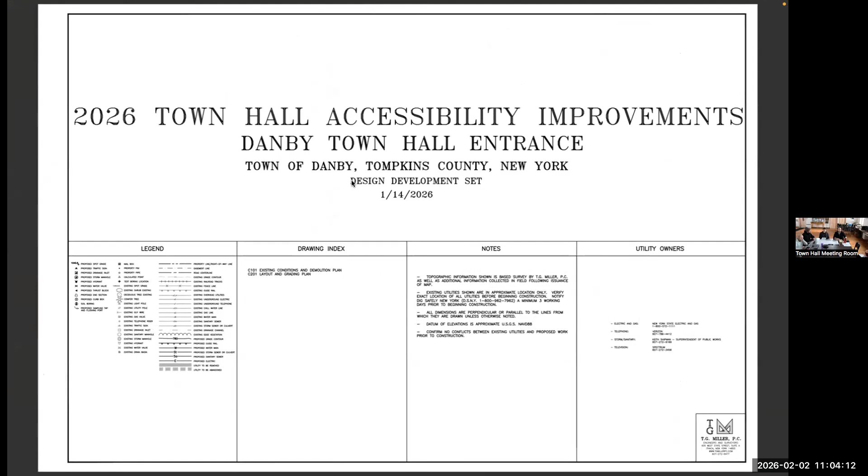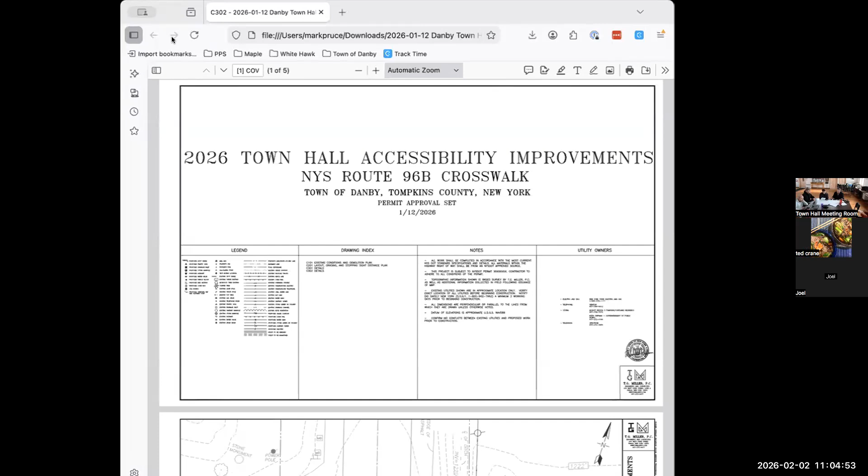Oh, that's great, but I think we wanted to talk about the crosswalk first. Is this all one PDF? There's another file. Okay. That's the crosswalk. Okay, let's do the crosswalk first. I'll download that one and share it. Wait, this one also says, oh, I see, crosswalk. Yeah, they're the same title, but the ending is different. How's this? All right, I think we're ready.

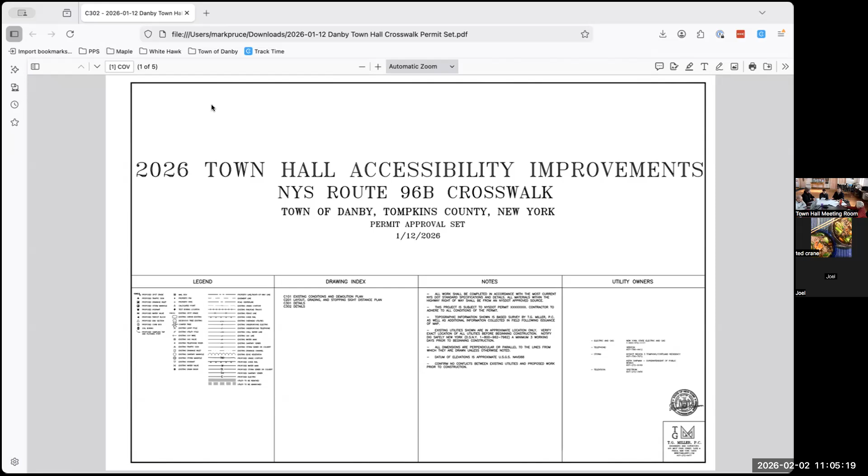Did you guys already look at the crosswalk plans as a group? Yes, but we wanted to flesh out some feedback with you guys. Do you remember that Leslie said something about the mailbox, that she was afraid that it went right into the mailbox? I mean, the mailbox can be moved. Right, it needs to be moved. We can start from the beginning and go all the way through it. Okay. That'd be great.

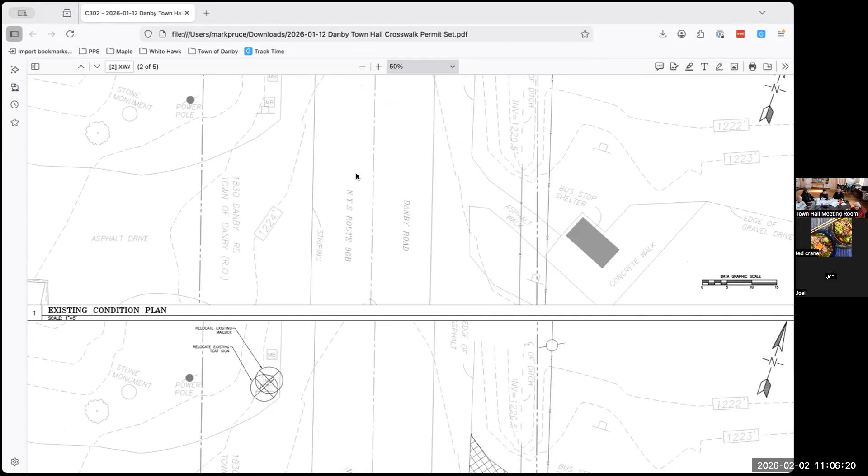So our surveyors came out, they surveyed everything. We then took a look at that versus what the town was trying to achieve and DOT regulations. We did reach out to Valerie with DOT before we started to make sure we were all on the same page. And she was great. Now we have our thoughts on paper. We wanted to get the town's approval on the crosswalk and then circle back with Valerie, submit for the actual permit. And then from there, we can figure out the construction side.

So how we got here: my understanding is the town desires to put a crosswalk from the bus shelter park on the east side of the road to the town hall entrance on the west side. With 96 being a state highway, you have to get a state permit. The state has a bunch of regulations, including stopping sight distance and sizes of the crosswalk. And then there's the general ADA standards that also apply. So when reviewing all that, we couldn't make the crosswalk directly perpendicular with the road. Generally, you want to be perpendicular with the road and the shortest path possible.

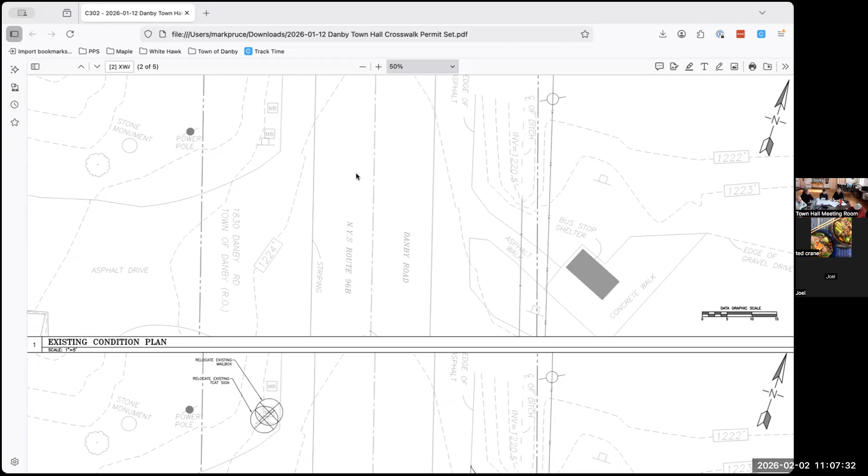Due to the existing walk location on the east side at the bus shelter and the driveway location, we just couldn't make it come across without having to make a lot of driveway modifications. So trying to be cost sensitive, we're proposing a slightly skewed crosswalk. We're hoping DOT will be okay with that. Maybe it's close to a 45, but it gets everyone across the street in a safe manner.

We were able to keep the existing driveway width. One of the other items we looked at was maybe shrinking where the driveway comes up to the road. We felt that probably wasn't the best route, being a municipal, semi-commercial setting. There could be a lot of traffic coming in and out depending on meetings. So DOT has regulations on how wide the driveway could be, and decreasing that we felt probably wasn't the best approach here. It is very wide where it meets 96B. But to get that smooth radius that DOT wants, that's the width it'd have to be.

The width back further into the parking lot, I believe it was around 26 feet. I'm not 100% sure on that. And bringing that straight out to the road and then getting that smooth radius needed for larger vehicles, it just wasn't gonna work. If DOT doesn't like the skew, we can look at that further, but we are trying to minimize the disturbance here to try and keep costs down.

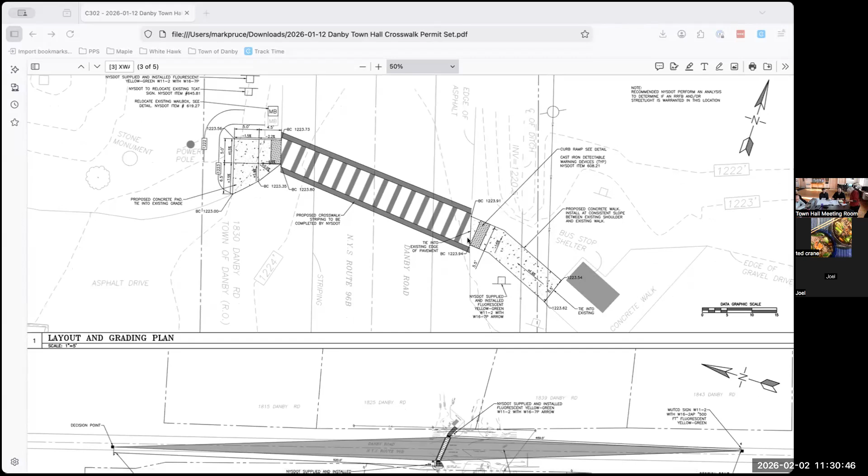It's interesting that TCAT puts on Google Earth that the bus stop is on this side at the monument. It's actually right the other side of the driveway. Our surveyors grabbed it when they surveyed. It's actually right by the mailboxes. This one, okay, cool.

So are we suggesting that you take a look at coming across where the monument is? I don't know if there's room. We can't move the monument, but we can look at that. I don't know if that would work, but I believe the entrance to the park, Google is calling it Daisy Lane, so there would have to be a ramp or another crosswalk across. I believe there's a stop sign coming out of Daisy Lane, so you'd need to cross Daisy Lane, the park entrance.

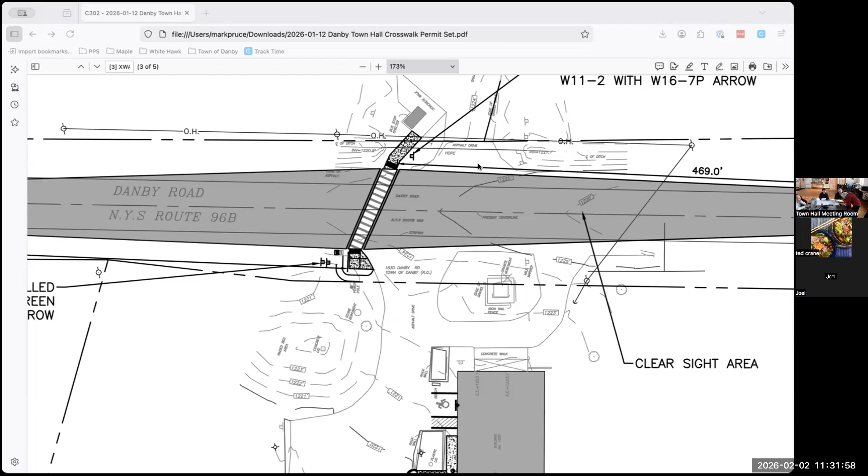North-south direction, if the crosswalk was to move south of it. If the crosswalk was to move down here, yeah, because there's a stop sign, this now has to be in a crosswalk. That is not a town road, it is a driveway. If there's a stop sign on it, is it private? Because it's a stop-controlled intersection technically, even though it's a driveway. Because there's a stop sign, MUTCD requires it to be a crosswalk.

Well, why is the requirement if the crosswalk is on one side of the street and not if it's on the other side? Because we're not going across the stop-controlled intersection. But it's not an intersection, it's a driveway. But it is an intersection because it's a stop sign entering a state highway.

Is that stop sign a private sign or a state sign? It should be a state sign within a state right of way. But the fact that the sign's there makes it a stop-controlled intersection. I've gone through this with commercial apartment buildings where the entrances, as long as there's a stop sign there, they consider that a stop-controlled intersection. And you might not need curb ramps, it's relatively flat, but that would have to be assessed and looked at.

And there's less room, looking at the zoomed in view with the contours, there's a culvert pipe. And that may have been why the original discussion was to the north, because of that culvert pipe and where that ditch is, that might require extension if some sort of ramp is required there, whereas the north is already flat, and the pipe was already extended, it looks like, for the original asphalt walk.

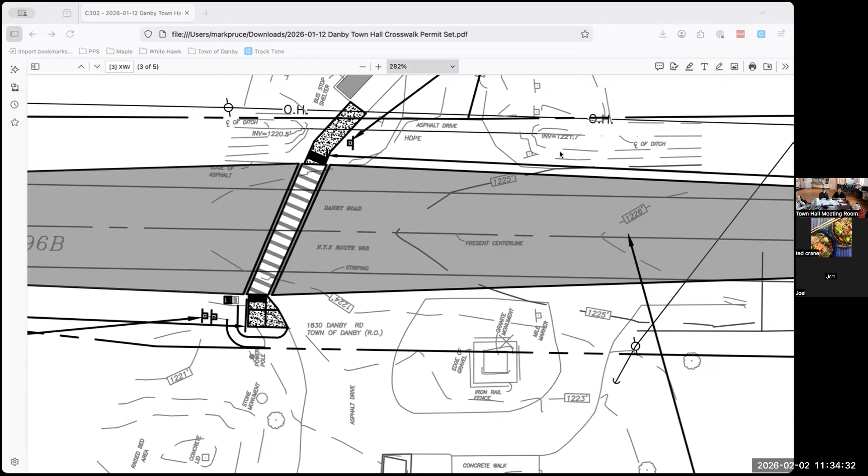Is there anything else about this project that you wanted to talk about or get feedback on? The only other thing, there's a note on the sheet, and I did ask this to DOT in my initial email, about RRFBs, the strobe lights. I know there was a desire to potentially put them here due to the speeds of the road. And emailing with Valerie, she said there's 3 scenarios. The town can perform a study and purchase them. The DOT can perform a study and purchase them. And the third was they can do a study and determine that they're not required.

So knowing there was a tight budget, we are proposing to just note to recommend to DOT to perform the study, because they would be under their maintenance and jurisdiction anyway. So we wanted to put on the plan that we recommend they perform a study for those, and also for a nighttime overhead light. Being a higher speed road, especially if people are speeding, making sure people are visible in that crosswalk would be a big issue. We could look at that, but it'd be a DOT light on a DOT road, and they ultimately would have to agree with our study, so they'd do their own analysis anyway. So our suggestion is to recommend they look at those 2 items.

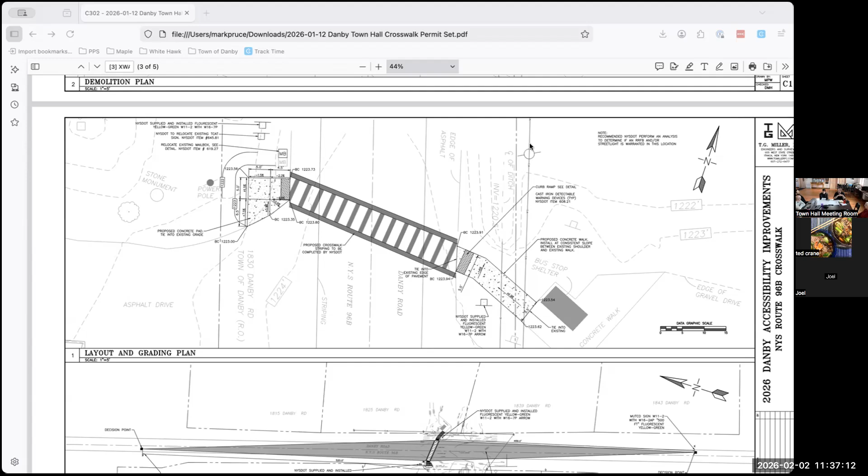Yes. Ready to move on. Okay. All right, let's see, I'll stop sharing for a second and get the other file. Oh, sorry.

All right. Let me scroll back up. Okay. We can probably start all the way in the last sheet, I believe. Oh, last. Oh, I see.

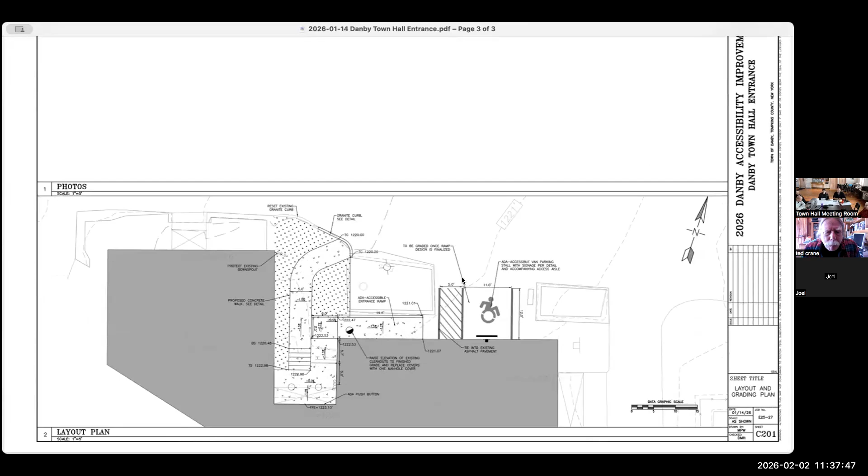There's only two. Okay. So I'll start off by saying these plans are not as refined as the other. There's a lot more, I want to say, customization available here, depending on how the town wants to proceed. There's some items we had to do some field work on here and I wanted to get them after this meeting, so I was trying to be cost effective and do them when we're here. So some things might slightly change. But I can go over what we found, what our design constraints are, and then where we have wiggle room, if that works for everyone.

Mm-hmm. So the big thing here for design constraints is a ramp. You're limited to 8%. We design everything to 7.5%, a little wiggle room for construction tolerance. Cross slope, you're limited to just over 2%. We limit everything to 1.5%. You're allowed 30 inches rise, I believe, before you need a 5x5 landing. And then you also need a landing anywhere there's a turning movement that also meets the 5x5 and the cross slope requirements, that we use 1.5% in each direction.

So where that's problematic in the existing conditions is up near the door. We're going to confirm this today, but we believe the existing slope is over that 1.5%. And with the pillars, columns located there, you need to have a 5x5 landing outside of where there's obstructions for someone to make that turning movement. And the pillars and the downspout shift that a little bit, so that landing actually grows and has to get bigger to incorporate that, to have that 1.5% in each direction. So that's why the landing is definitely bigger than it is now.

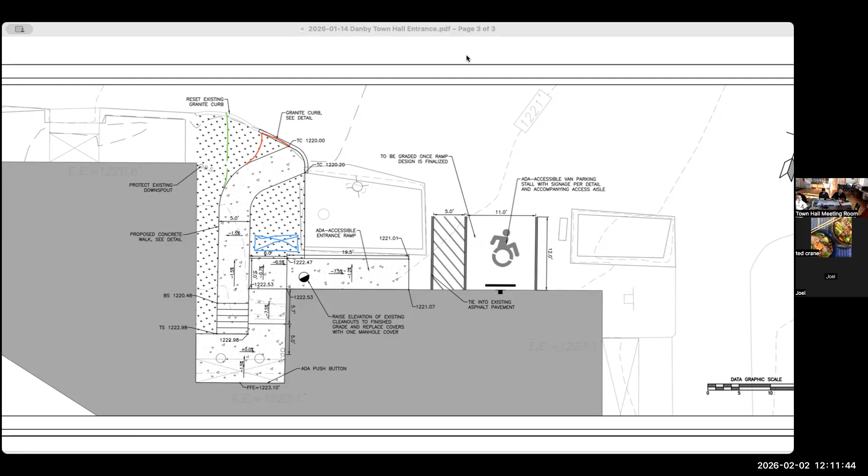You guys have a lot on your plate at this point. Three weeks? We'll reach out after we've gotten back into it. Okay, very good. But yes, if you focus on materials, that'll help us. And we'll make the dimensional and elevational changes and probably come back with some elevations superimposed on some pictures for bidding documents. Very good.

I thought there were a couple more things yet to talk about. I'm guessing there's really no need to extend the retaining wall for the planter beyond the end of the building, because you're going to have an elevation change that's going to be problematic if you try to carry it all the way to the curb. And are we taking off the table any thought of the patio, which had been talked about before, in favor of doing the grassed area? I think we talked about this area being more of a patio with a bench.

Yeah, let us get elevations and everything figured out, and then the fine details on what the flat areas are material-wise, we can figure that out at the next meeting. Excellent. It's really easy for us to say, instead of grass, it's concrete or something like that. Probably not concrete, but yeah. Is there any way, we didn't talk about this, a flagpole could be integrated into the overall area design?